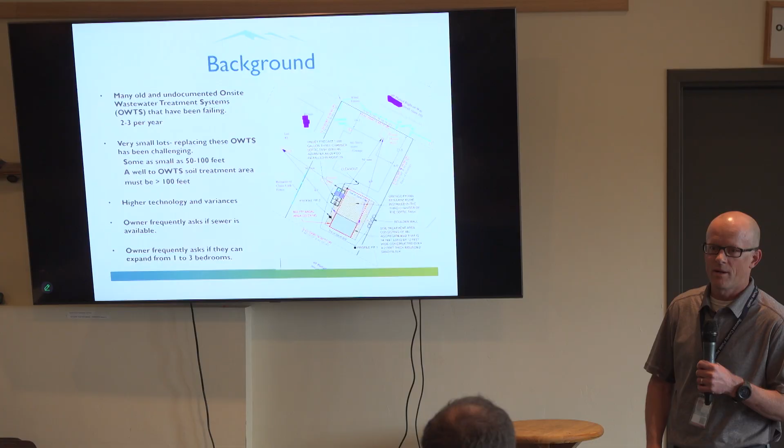Everything going well with the Zoom, Connor? Yep. Okay, people can hear and see okay.

So here's a little bit of background. Many old and undocumented on-site wastewater treatment systems in the Heeney area. And we see them failing. We're seeing about 2 or 3 a year in the Heeney area, and then we work with folks to get those systems replaced. Sometimes they require variance.

Our new regulations, as of I think about 2018, allow us to do higher level treatment technology systems, and then you can reduce setbacks to wells or to surface water, wetlands. So we've seen less variances lately because people are allowed to go with a higher treatment technology that produces cleaner water to justify encroaching on some of those setbacks. But those higher treatment level systems cost money.

We had a system last year that some of you are aware of that got replaced, $120,000. And so septic systems, especially of these higher level treatment technologies, are not cheap, unfortunately. So when you start to talk about what a sewer system will cost, just kind of keep that in mind. Average septic system is about $50,000, maybe $40,000. They can be less, they can be more, highly variable. But man, as you know, nothing's cheap these days, unfortunately.

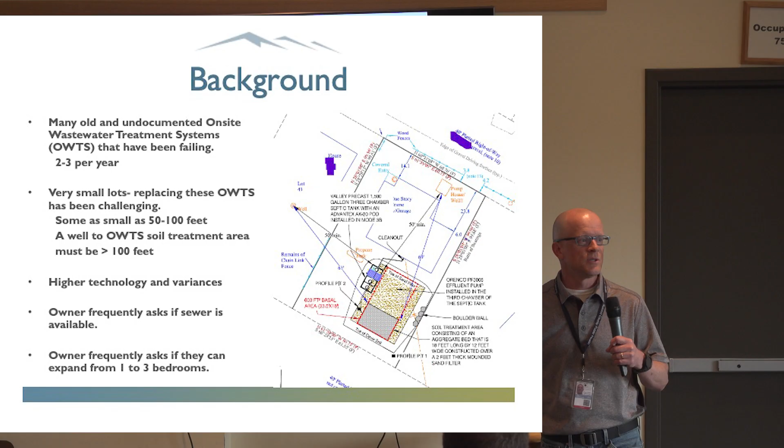So very small lots. Here's an image of a lot in the Heeney area. Does it have the dimensions? Yeah, it's got some dimensions, but some lots are 50 feet wide by 100 feet long. It's about a tenth of an acre or so. A lot of them have been combined into 2 or 3 parcels. But a small lot here is about a tenth of an acre, just over.

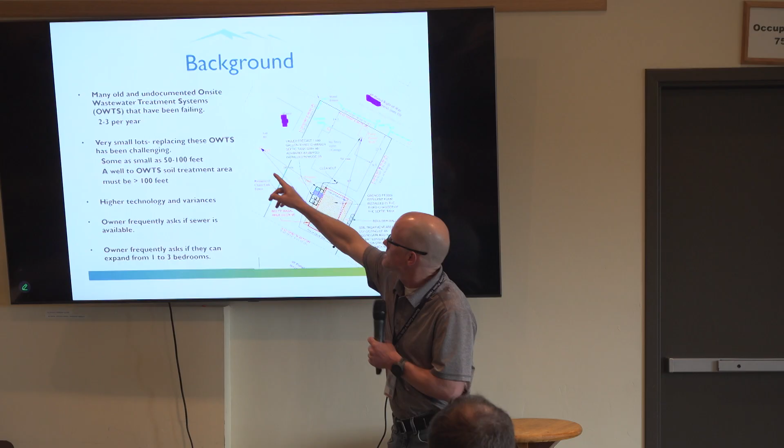The setback from a leach field or soil treatment area, we call it, to a well is 100 feet. And so you can see the problem when a property is only 100 feet long and you're trying to get these separation distances, it becomes a real challenge. In this case, we had 63 feet to a neighbor's well and 69 feet to an on-site well. We went to the Board of Health and got a variance because they just did a higher treatment technology system to justify a lesser distance there. I don't remember what that system costs, but it's expensive.

Higher technology and variances, we talked about that. Owners frequently ask us, is there a sewer system available that I can hook up to? The answer is no. The next question is, why not? I don't know why not, because there's a lot of variables. We'd have to install this and that, a treatment plant. And so I could never answer that question.

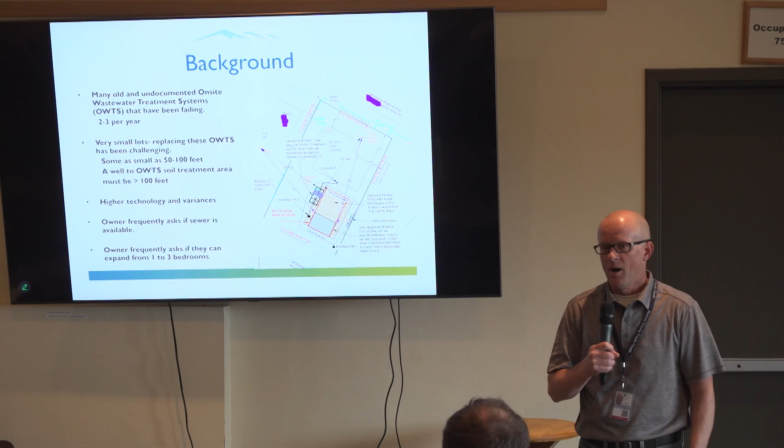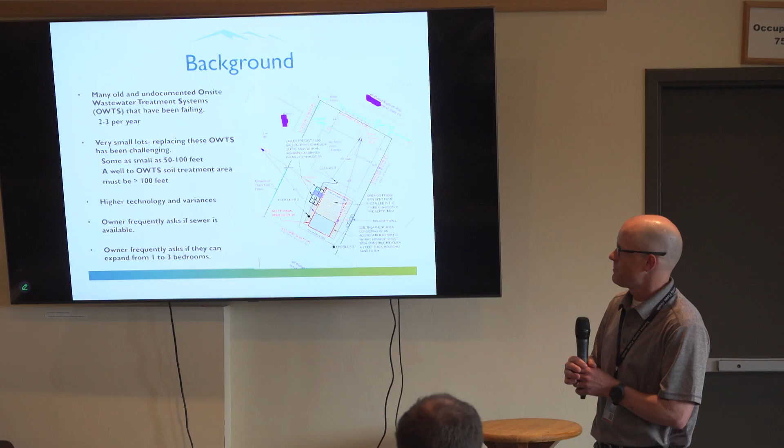Owners frequently ask us as well, oh, I just bought this house for a steal. You guys know what a steal is these days. But a lot of homes in the Heeney area are a lot less expensive than in the southern part of Summit County, but you're limited. So you've got a one-bedroom cabin. Your family's growing. You want to pop the top and make it a 2 or 3 bedroom home, and you can't. You're limited by your septic system in a lot of those cases.

Next slide. So the background, Environmental Health requested permission to commission a study that explores the development of sewer in the Heeney area. It's just asking some of these questions that we've had over the years. So the Board of County Commissioners approved $25,000 to go towards this study. They actually approved more than that initially, but then we pursued grants. And a Department of Local Affairs grant was acquired for $25,000 to help pay for this initial study.

Environmental Health contracted with JVA Engineering. They've got extensive background doing these kinds of studies and beyond in the actual design and construction of these types of systems. I think one of the principal engineers lives in the Eldorado Springs area.

If some of you know, that's kind of down in, I'll say it, Boulder. It's kind of dangerous to use that term around here, I know.

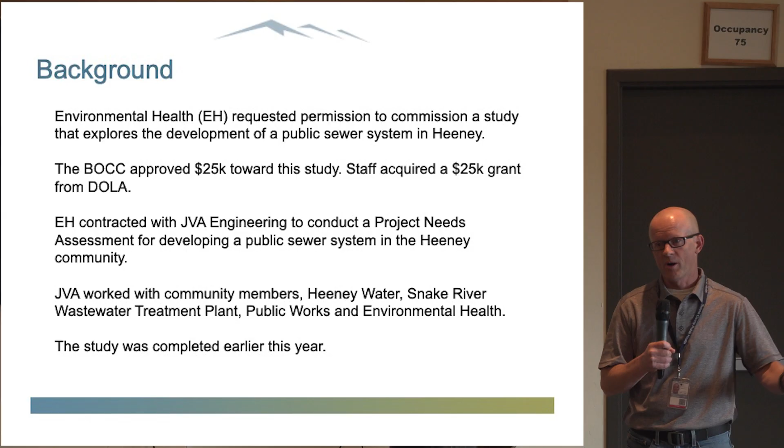But in the south part of Boulder, where Eldorado Canyon comes out, there's a little community that's not too much bigger than Heeney, probably. And one of the principal engineers lives there and went through this whole process for that community, so a lot of experience there. So they call this a project needs assessment. It's kind of the first phase with the Colorado Department of Public Health and Environment process of permitting these kinds of systems.

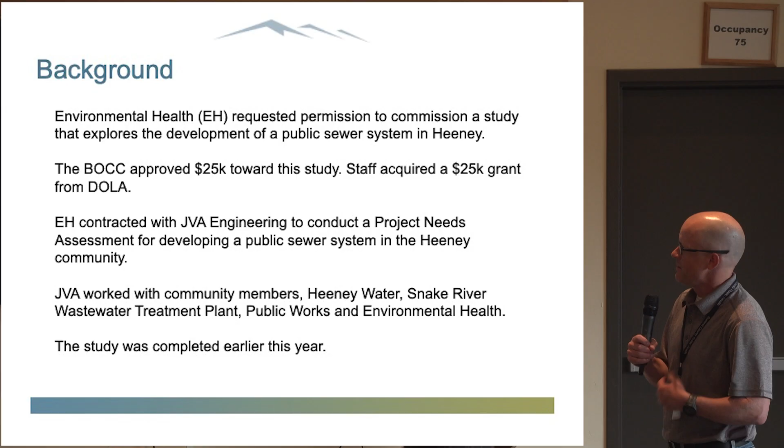So JVA worked with community members, many of you in this room, the Heeney Water District, Snake River Wastewater Treatment Plant up by Keystone, Public Works folks, which includes the engineering department, and then my department, Environmental Health. And this study was completed earlier this year. Next slide.

So in our request for proposal, we identified some of the questions that we would like to maybe not have 100% clarity answers on, but we just want to explore, including what a collection system might look like, treatment options, plant locations, discharge options, phases of construction, cost estimates, and then finally, what potential funding options might be. And that's one thing to consider.

When you have an on-site wastewater treatment system that fails, there are no grants available to you to make those repairs. There isn't a revolving fund system. You're basically limited to paying for it with cash or like a home equity loan. We see that a lot. We also see a lot of repairs happen at a point of sale. The system's kind of been hobbling along and someone's going to buy it, and hopefully there's equity in the sale to pay for that as well. But with sewer, there are more funding opportunities, and we'll talk about that.

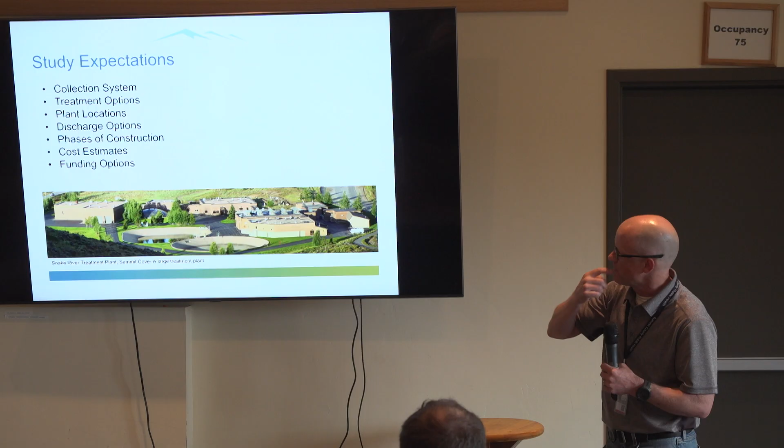At the risk of people interpreting this image as what you're going to potentially see in the Heeney area, I threw this in. This is nowhere near the size of what your system might look like. This is the Snake River wastewater treatment plant. Next slide. I think I'm handing it off to Ryan. Great.

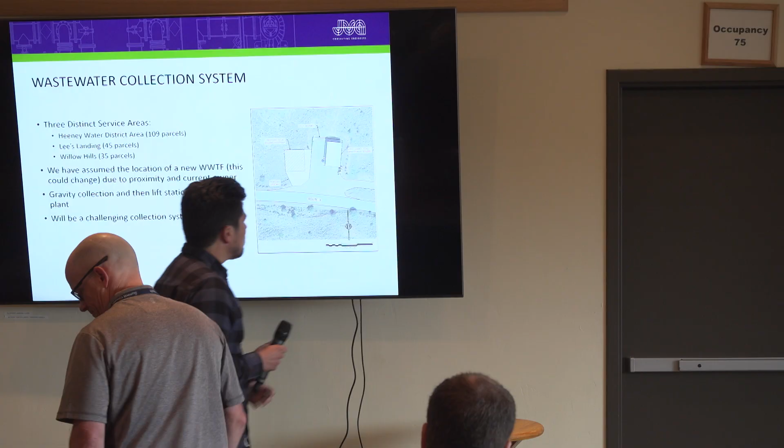All right. Hi, everyone. Again, my name's Ryan Gomez. I'm a design engineer with JVA Engineering. So to dive a little bit more into the technical specifics of this report, one of the main first questions that we wanted to answer was, what would a collection system look like in this community? Knowing that there are a lot of really small streets, a lot of really small lots, it can get a little challenging to design that.

And so we broke the community into 3 distinct service areas. Heeney Water District is the term for the area that's currently served by the Heeney Water District, at about 109 parcels. I understand Lee's Landing is not the correct subdivision name, but Lee's Landing, about 45 parcels as well, and then Willow Hills down there to the southeast at about 35 parcels.

And so the reason for breaking these up is really feasibility. Heeney Water District, having water service lines and having these predetermined easements, is a lot easier to design a collection system for compared to Lee's Landing and Willow Hills, where all those lots are on smaller OWTSs or wells and don't have those easements already in place to be able to build a collection system.

So we'll talk a little bit more about how that affects cost estimates and everything as well, but I think the main thing to think about in terms of the collection system is there's 3 phases. Heeney Water District is kind of the main collection system that would be considered part of the main project, and then the Lee's Landing and the Willow Hills subdivisions are kind of considered more like adders for this project. So

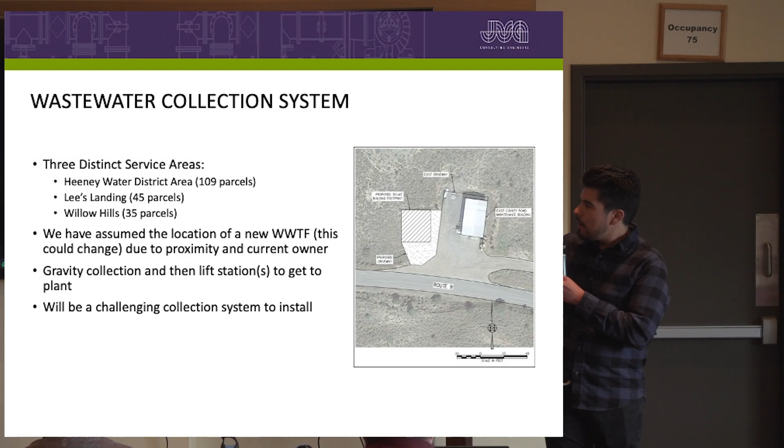So as of right now, I think in our report we referenced having a lift station for each of the subdivisions at kind of the low point that would be able to collect wastewater flows by gravity from those subdivisions and then pump up to the wastewater treatment plant where it would be treated and then discharged. Pretty much the thing to take away from the collection system is, regardless of the subdivision, it will be fairly difficult to install. It's going to be definitely a challenging construction project.

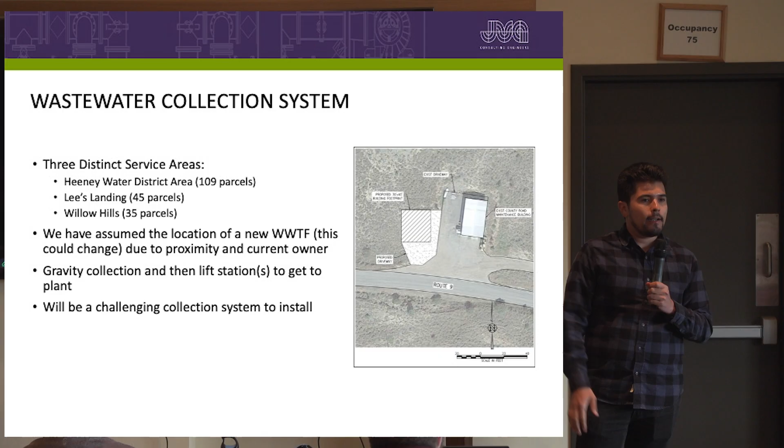The Heeney Water District having those water service lines proves it can be done, but it is definitely something to consider, especially also considering the shifting of the soils that is present within the Heeney community. So just something to consider in terms of the collection system, kind of broken up into 3 different subdivisions, and there are going to be challenges with installing it in each of these, but the Heeney Water District is kind of the one that was focused around for development of the actual cost estimates. And then, of course, we had adder cost estimates for the other two subdivisions. Next slide, please.

So here is just kind of a map showing our wastewater collection system. We also have a larger map here on the side if you'd like to take a look at any point. Like I said, this Heeney Water District here on the left side is really the main, call it, community that would be planned around in terms of this project.

Just from a, I'm okay, thank you though.

Just from a feasibility standpoint. And then the Lees Lakeshore and then the Willow Hills area would be kind of considered as add-ons, whether those community members would like to have this be included in the project.

The main thing just to also point out here is these red lines, those force mains. Those are where you're pumping from your pump stations, denoted by those red dots. Those are kind of at your low points, and those would be pumping to your wastewater plant. Noting the location of those, I did want to just point out that they're not in the floodplain, and they were selected for both being at low localized points where they could collect all of those flows by gravity without being in the actual floodplain for the communities.

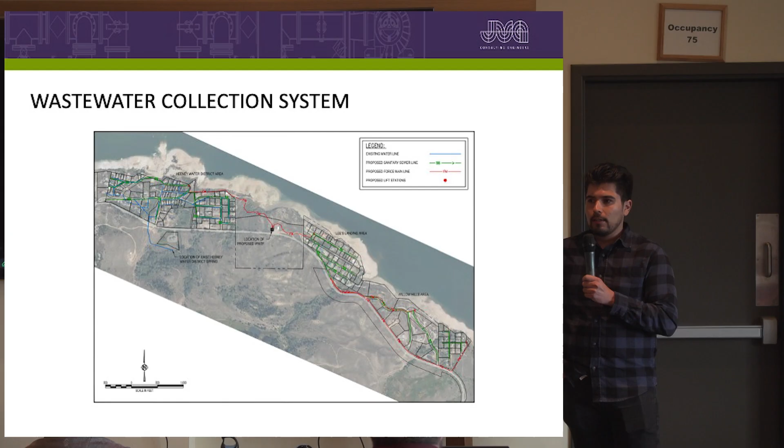Next slide, please. And then to kind of wrap up my portion, just wanted to give a brief overview of wastewater treatment for those who aren't as familiar. To kind of start at the beginning, you have your pump stations that are pumping your flows to an equalization tank, and that's pretty much just getting all your flows into one tank that then allows you to control how quickly you're feeding flows through your treatment system.

So if it's late at night and no one's really using the sewer system, your sewer treatment plant isn't going to go dry. And same thing if it's 7 a.m., it's not going to overwhelm your treatment system. It would then go through a headworks facility, which essentially is just screening out all of those rags, feminine hygiene products, things that could get into your equipment and damage them, really trying to protect your downstream equipment from there.

After that, secondary treatment is kind of the real workhorse of your treatment process. Simon will talk about the selected treatment process here and go a little bit more in depth into what the secondary treatment process is, but more so just to understand that this is really what's doing the bulk of your treatment for your effluent. After that, you would have tertiary treatment and solids handling.

Solids handling is really what it sounds like. You're removing your solids from your actual treated effluent. Depending on the application, I think within this system, it would be processed into biosolids. What do you think of those? I'm trying to think of the actual term. Biosolids is fine, but manure that's used for land applications, things like that, you're removing all that from your actual effluent, getting the water to then be treated for discharge back into the systems.

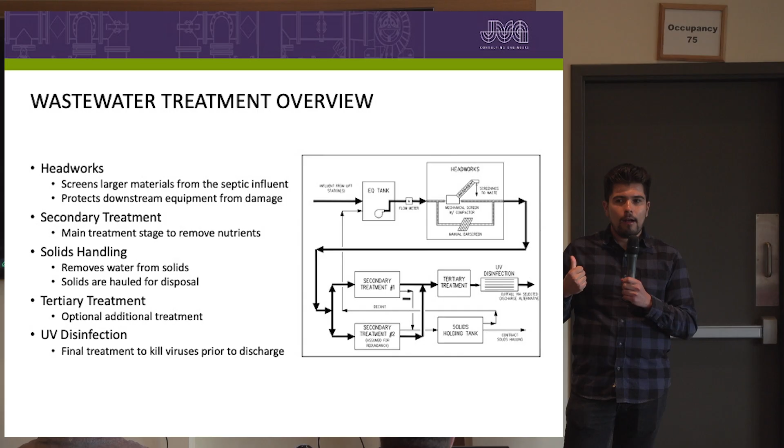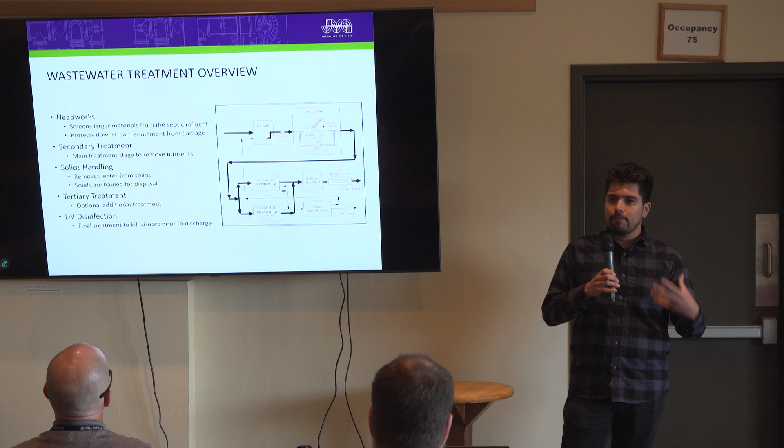And then lastly, you have UV disinfection. This is really just killing all those viruses, cryptosporidium, giardia, anything that's still living within the water. That's killed by UV disinfection before it's discharged into the river. So with that in mind, I'm going to hand it over to Simon to talk a little bit more about the secondary treatment process and what proposed project we have here for the Heeney community. Thank you.

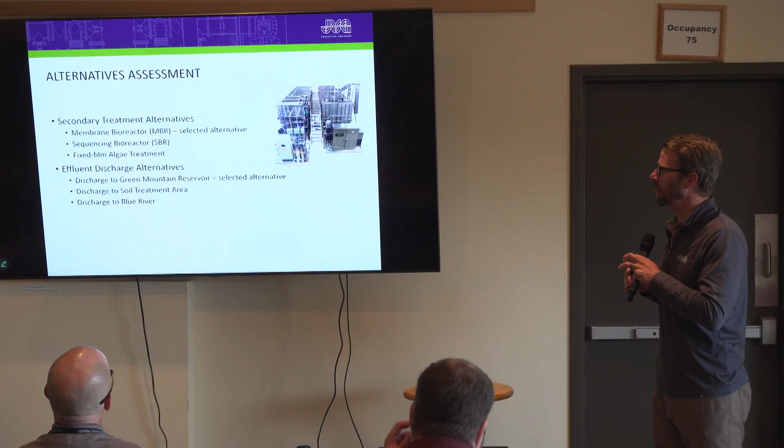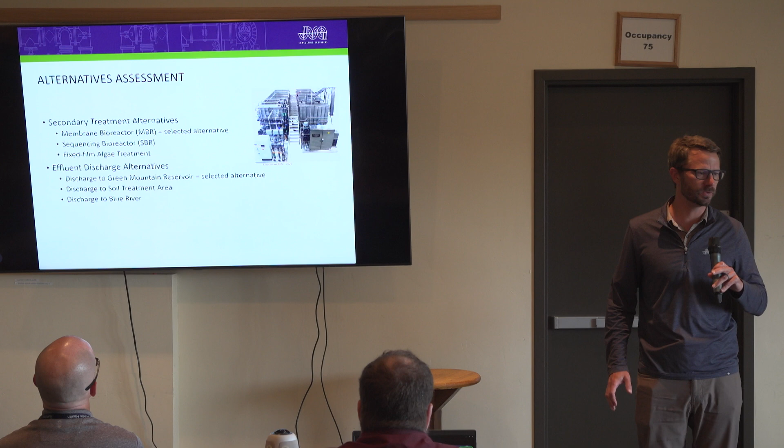Thanks, Ryan. Next slide, please. So once again, I'm Simon Farrell with JVA. I'm a project manager. I actually used to work for the Summit County Environmental Health Department at the beginning of my career, but I've been in consulting engineering now for the last 12 years. I do a lot of these small systems, we call decentralized. This is kind of a unique aspect within wastewater treatment, looking at systems from 2,000 gallons per day to 100,000 gallons per day.

So for the alternatives assessment, what we looked at were three different treatment technologies. What Ryan just covered is universal to these three technologies. We looked at a membrane bioreactor, an MBR, a sequencing batch reactor, an SBR, and also a fixed film algae treatment. These are not the only three options available, but these are pretty common for the flows you're looking at, about 70,000 gallons per day. So I'm going to walk you through what those three technologies are.

So starting with the membrane bioreactor, that's actually what you're seeing on the right here. That's what the report is based on. You could use the term package system for this size of flows. This would be a package wastewater treatment facility. A membrane bioreactor basically just doesn't have clarification on the end of the treatment process. Instead, it has a membrane. And what that allows for is usually higher levels of tertiary treatment.

It would be more of an intensification of the treatment process, so it's typically a slightly smaller footprint, a little bit higher energy input, but higher water quality coming out, and also more control over that water quality because you have to pass through the membrane in order to discharge. That is what we've selected so far for this report. The reason for selecting the membrane bioreactor is due to tertiary treatment and effluent quality. You guys obviously are discharging to a pristine Green Mountain Reservoir, and we believe the membrane bioreactor would be the most protective of water quality.

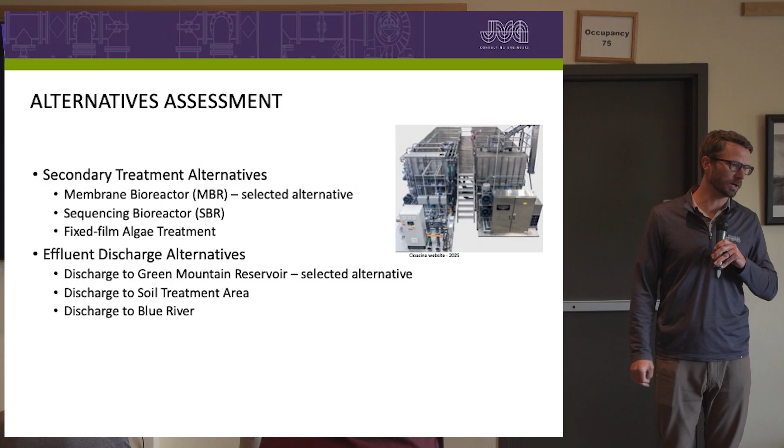Effluent discharge alternatives. We looked at three different ones: discharge to Green Mountain Reservoir, discharge to a soil treatment area, and discharge to the Blue River. Discharge to Green Mountain Reservoir is ultimately what we selected. That would be from the location where we're proposing the plant, having an outfall going into Green Mountain Reservoir. Obviously, Green Mountain Reservoir changes in its water elevation quite a bit, as you can see today. So that would be a unique design for the outfall.

The discharge to soil treatment area was one of the first things we looked at. So this would be groundwater discharge. This would basically just be like a scaled up version of what you have at your home right now for a soil treatment area. The issue we had there is the land requirement. Back to the napkin calculations, we're looking at 8 to 9 acres in order to apply that wastewater at 70,000 gallons per day, and getting 8 to 9 flat acres in this area, with high cost per acre, was quite the challenge.

We also looked at discharging to the Blue River. Where the plant is currently sited, that would be a very long conveyance in order to get to one of those discharge locations. So it really increased the cost quickly in order to get to that location.

One thing I will add is that these are preliminary recommendations. If you decide to continue to move forward, once you get preliminary effluent limits for these different locations, they can influence the cost of the overall project. An example would be you have to meet different limits when you discharge to groundwater than if you discharge to a reservoir, than if you discharge to a certain point in the Blue River.

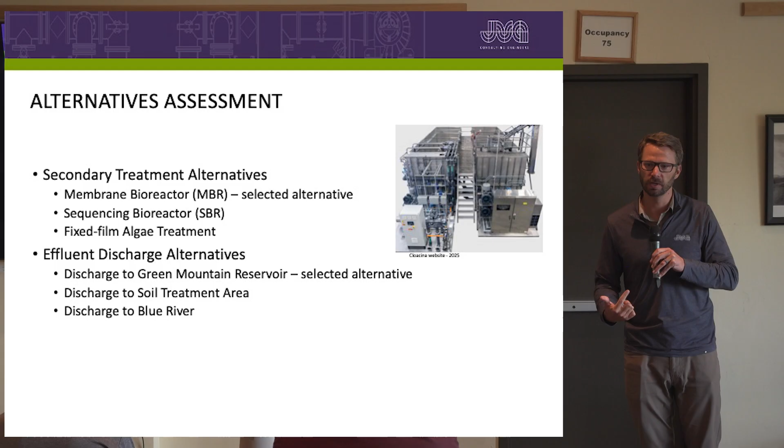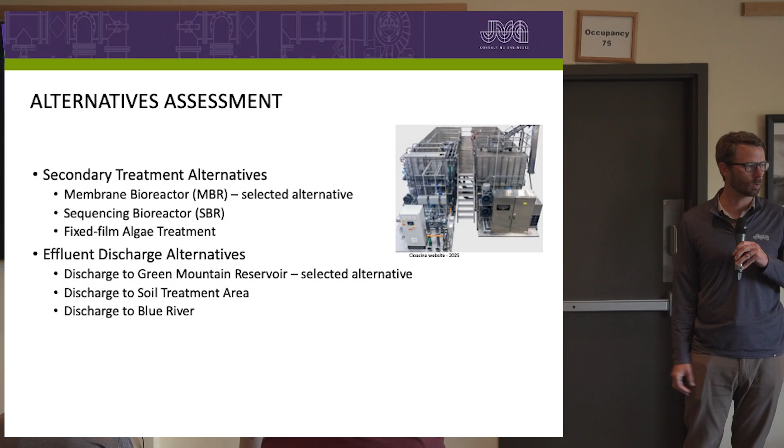And there's a process you have to go through in order to make that determination. And we do find sometimes that when you go through that process, you find out that, even though it's going to cost more to discharge in this location, it's worth it because of the limits that would be required of the plant. Next slide, please.

All right, so for this proposed project, Ryan covered the sewer collection system. We started with what we called the Heeney Water District area. I know there were some questions like, why did you start there? It was very high level. It's the most parcels, and there's already a district. So if this is to move forward organizationally, the citizens would have to either have the Heeney Water District form a wastewater district or take that on as part of their district, or form a new district. That's not a trivial undertaking.

We've seen that hold up a lot of projects: how do you get the community organized behind forming a district and funding debt and making those hard decisions? And since you're already doing that with the Heeney Water District, that seemed to be a logical place to start. That was the rationale behind that decision. There would be a single lift station at the low point pumping to the proposed location that Ryan covered earlier.

And then what does that system look like? Similar to what Ryan covered, you're going to have your influent pumping station. You're going to have your headworks for screening. We based our price on a specific manufacturer because we were able to get a proposal from them for a package system. This is a Cloacina MemPac MBR package treatment system. That's where you'd have your secondary treatment. So you'd have aeration for secondary treatment.

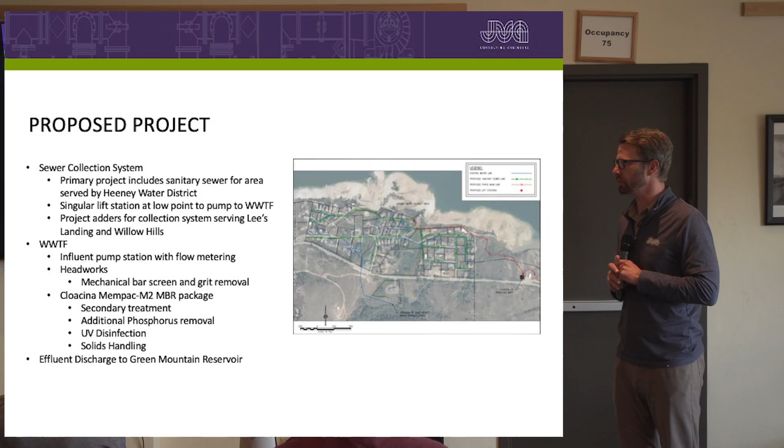UV disinfection, right? A final step to inactivate any type of bacteria that's made it through the process, and then the solids handling. We would not be doing any mechanical dewatering. The scale is not large enough to justify the cost there. You would actually have liquid hauling of solids, so that would be liquid hauled to another facility. And then ultimately, the effluent would get discharged to the Green Mountain Reservoir. Next slide.

All right, project costs and funding. So for that first phase where we're just looking at the Heeney Water District area and a treatment facility, we're coming up with a capital cost of $12.2 million. That does not include the collection system for Lee's Landing, an additional $1.2 million, or Willow Hills at an additional $2.5 million. As we talked about, organization is really going to be a challenging part of this project, and really a next step is: is the community motivated to take something like this on, and who's going to be the champion to look at how you would form a district and how you would service the debt in order to make this happen?

There are a lot of different ways to fund these types of projects. So if you were a district and you're going out and applying for funding, I can give you a few examples of funding packages. One is the state revolving fund. Dan mentioned this earlier. This is a very typical funding mechanism for districts throughout the state. They offer low interest loans, right now in the range of 3 to 4%. It varies based on the bond market. They also have an arm that is grants that would not be paid back. However, grants are prioritized for disadvantaged communities.

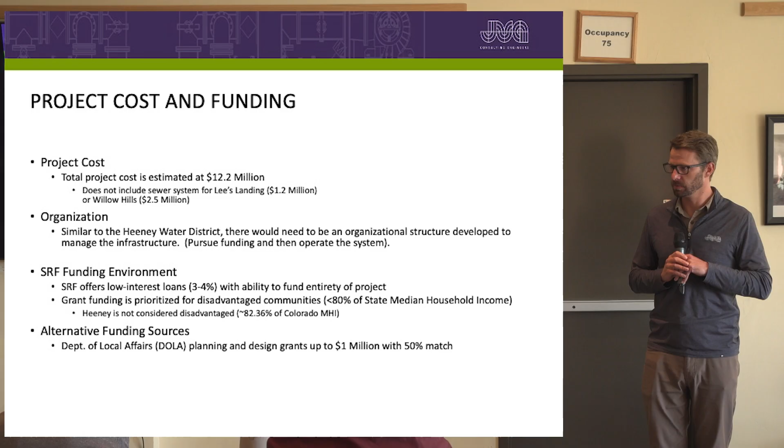I believe that's it. Next slide. Dan, back to you. Thanks, Simon.

So the study that was produced is a public document. We currently have it available on our website for anyone to go and take a look at. We've got Brad over here filming tonight. He's going to put together a video. We'll also have that available.

And so I just want to make everybody aware of that resource, because there's a lot of people here tonight, but there are people that aren't here tonight that have interest in this. There's also people who are going to buy a house in 6 months that may have interest in this, and so that's where they can get this information. And of course, you can reach out to any of us and we can provide it to you as well. Next slide, please.

So next steps. Where do we go from here? It's up to you. The residents will decide, like Simon said, if this is a priority for the folks in Heeney to pursue. You guys will motivate to form a wastewater district. I'm not that familiar with how this process works, but I think it goes through our planning department and our board of commissioners and different things.

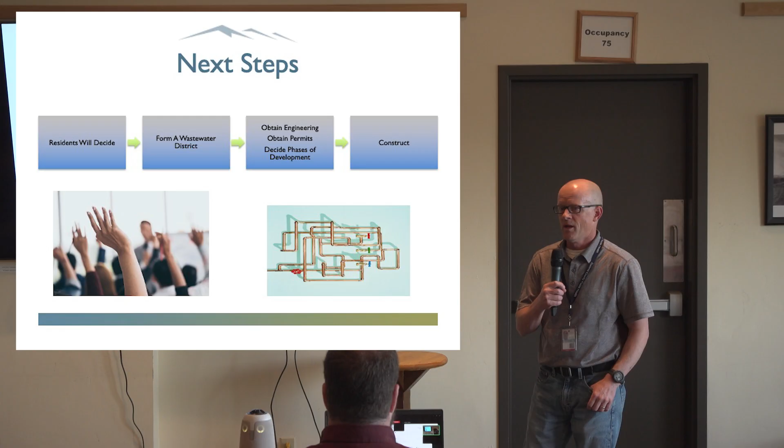The motivation was you can buy into the district at today's prices, and then 10 years from now, when your septic system fails, you've already paid that district inclusion fee, and so then you would just pay your taps and then the construction costs. So there's a lot of decisions that the wastewater district would need to consider. And then, of course, the construction phase would occur after that. Next slide.

So thank you, and again, thank you to the commissioners for helping to fund this study. And so with this, I think we're prepared to take some questions. I know that we've got about a couple dozen questions that have already been provided. And so maybe we could start by going through those questions and then open it up for questions either from the Zoom or here in person.

So with that, I'll start and ask some of the questions, and then based on each question, we will kind of determine who's the best to answer. We'll probably be repeating the questions just so that we can pick up the feed on the video that we'll be producing. Have there been any tests showing wastewater pollution in Green Mountain Reservoir? Slimy green moss at inlet that didn't used to be there, possibly coming from Silverthorne plant.

The answer to this is no. We don't have any tests showing wastewater pollution in Green Mountain Reservoir. If we did, this would probably be a different conversation because it would be something that would be pushed a little heavier than where we're at now, where it's voluntary. Why is the Heeney Water District community the first phase when there is a water system?